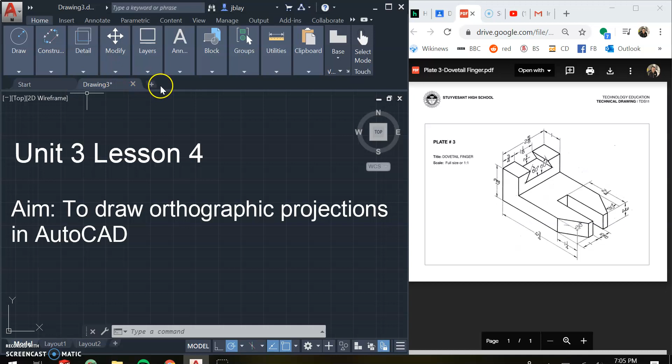So let's get started. Let me open a new tab and start with the front view. We're always going to put the front view in the corner here. So this one's going to have an L shape. As I start doing these, I'm not going to draw any of the hidden lines. I'm just going to draw object lines to start, and then I'll work my way back and draw in the hidden lines.

I'll start by drawing a line for this vertical one here that's 1 3/4. So I'll start at 0, 0, and draw it vertically, 1.75. I'm not going to be able to see it because it's so small, so I'm going to need to zoom in a bit. Draw a line here that starts at the origin and goes the length of this, which is 4 3/4. So I'm taking 4.75.

Then I'm going to draw this line here, this vertical portion. And if I look over here, it tells me that this is 3/4 of an inch tall. So it's 0.75.

I'll go start a new line. I'll go from this corner in, and if I look over here, it tells me that it goes in here 1 inch. And then I go down, and I go down. Okay, it doesn't really give me a measurement here, but it does give me a measurement on the outside. It's 1 3/4. I know this is 3/4, so this must be 1 inch.

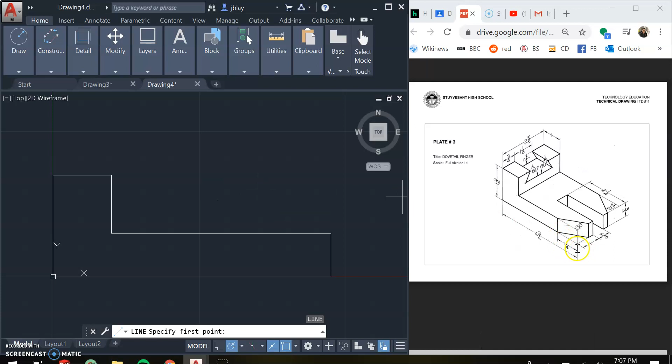And then I'll just connect these two. Okay, great, we're doing great. All we need to do is draw this line here, and we're done with our front view minus our hidden lines. So we'll draw a line, and if I look over here, this is 1 1/4 inches in. So actually, I have a line here—why not just offset it 1.25 inches to the left? Great, there is my front view.

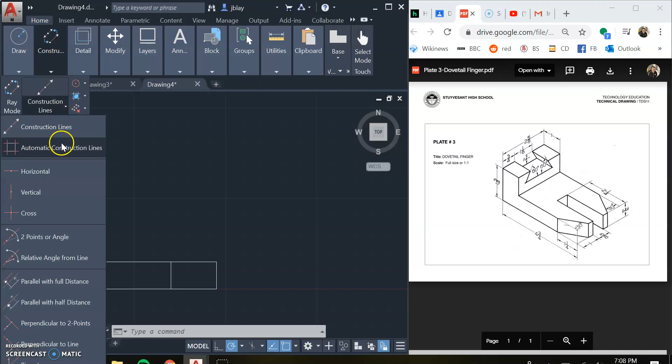Now what I'm going to do next is going to help me a lot. There's one of these construction line options I haven't shown you how to use yet. It's very useful for orthographic projection, and it's called automatic construction lines. What this does is it allows you to select an object and it'll automatically create construction lines that go in whatever direction you select. Now I'm going to just have it go in every direction.

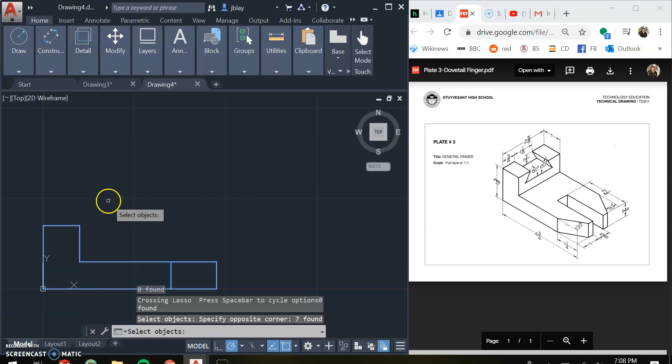I'm going to select all of this. The way I'm able to select everything here is I click and move my mouse. I don't click and hold my mouse, because if I click and hold my mouse, I get a lasso. I click, I release my mouse, move it over, and click again. I hit enter, and it automatically generates construction lines that go in every direction.

One note on these construction lines, though: they make two separate rays. It's not one construction line that goes vertically, it gets broken up. So if I were to delete this line, there wouldn't be a construction line behind it like we normally would. So it's a little bit different in that sense. Otherwise, these construction lines are the same. This is very, very useful for what we're doing right now.

Now I'm going to work on my top view. So now that we're starting our top view, we need to know what space we need to create between views. Usually we would have covered this by now, but because we skipped past mechanical drafting, we haven't talked about it yet. The space that we're going to maintain between our views is 1.25 inches.

Now this isn't a requirement. There is no hard and fast rule about this, but for these it is a requirement because it just makes everything fit nicely. If our scale was much bigger, if we had much bigger objects, we'd obviously want to create more space between our views. If we had much smaller objects, we'd obviously want to have less space between our views.

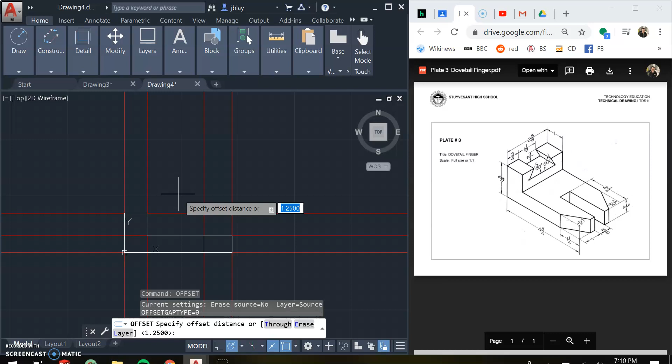But for this, 1.25 is really the perfect amount. So to do this, we're going to hit offset, or 1.25 inches, and we're going to offset these construction lines that far.

Now this is a little annoying because we didn't have a construction line that goes all the way through over here. We have a bit of a break in this section, so I'm just going to create a new construction line that goes horizontally through here. Now I have everything filled in. You can go through and delete those other two if you want, so you just have one.

Now what I'm going to do is create an offset construction line from the line I just drew. This is the start of my top view. Now what is this dimension? I have height and width here — this is my top view. I have width and depth going in this direction.

So my depth is 2 5/8, which is what I'll type in here. So I'll do offset 2 5/8. That math's a little tricky for me, let me think for a second — 2.625. Okay, and I offset that. Click, hit enter, escape, I'm done.

I've created the bounding box for my top view, and I might as well draw a rectangle here.

Okay, now I have these two projection lines. Let's figure out what they're for. This projection line here is for this line over here, so I'm going to draw a line there.

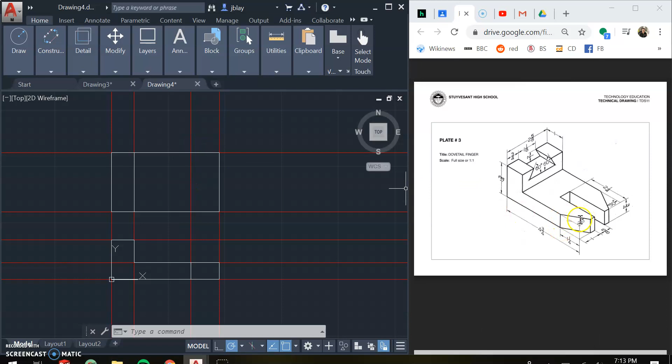Now this projection line, what does that line up with? Let's look over here — it's this line over here that creates that projection of width, this line, so that's this cutout here. So we're going to have from this red line two lines that extend at this angle here, 30 degrees.

So I'm going to type in line, start here. I want to go at 30 degrees, so I'll hit tab, 30, enter, and then zoom in a little bit so we can see what we're working with. I'm going to trim, get rid of that extension, and then mirror this to the opposite side.

Be careful — let's say I haven't mirrored yet and I decided to trim my corner. If I wanted to mirror this edge over to the other side, my midpoint is suddenly in a totally different place because I've cut this line short. So be careful with that — that's why I'm not trimming this corner until after I mirror to the other side.

Got a little crossed up there. Okay, now I have those two corners. Now I should trim.

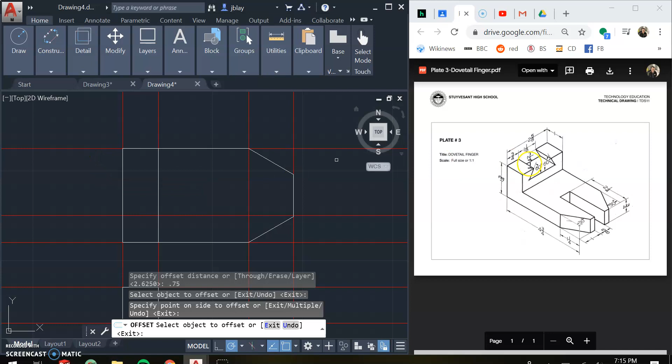And if I do some math here, I can figure out that this distance is also 3/4 of an inch. If I did 2 5/8 minus 1 1/8 and 3/4, I can see this is also 3/4 of an inch. Alternatively, I can just select this line and go up another 1 1/8 inches, so 1.125. And I've set up the positioning for these two lines.

The nice thing about these construction lines going forever in both directions is I'm already setting up my projections as I draw, because I'm going to need to project these features over to my right side view. All right, I'm almost done with my top view — I just need to do this indent here.

Now, I know this indent extends 2 1/4 inches in, but I need to figure out where it starts. Okay, let's see — over here it says it starts 1 inch in, so I'm going to do the offset again, 1 inch. I'm going to offset this construction line up 1 inch.

And then I look at it — 1 inch, and then it's another 5/8 of an inch to the end of the indent. So I'll type in 5 divided by 8 and hit enter. And then I can start my indent. I can draw a line that goes 2 1/4 inches, so 2.25.

And it goes down till it hits here, and down till it hits there. And I can trim so that this is gone. Okay, this is all good and set up.

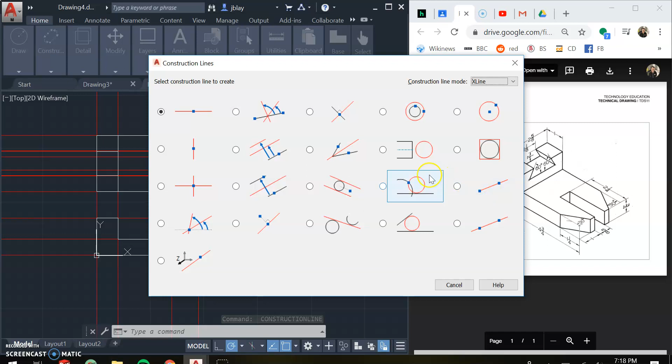So instead of using a regular construction line that goes forever in both directions, I use the type of construction line that only goes in one direction, a ray. So I'm actually just going to type in ray, R-A-Y, select here, and then it'll prompt me to select a through point or an angle.

So I'm going to hit tab, and if you remember, our miter lines are always 45 degrees. So there's our miter line.

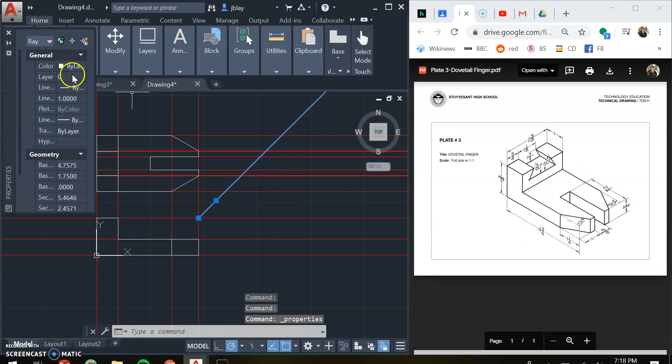I'm going to change the color of it. I'm going to go to properties here. So I would right click on the line. Let me escape this. I'm going to select the line, right click on it, and go to properties, and then I can change the color of the line. I like to make mine green.

Now I've already projected all my features of height over from my front view. Now I have to project all my features of depth over from my top view. I've already projected them over to the right, but now I need to project them down.

So I'm going to go into construction line, and I'm going to select a vertical construction line. And everywhere where my construction lines intersect with my miter line, I will draw a vertical construction line.

Okay, and this should have almost everything I need for my right side view. It exists within here. And what you'll see actually is this distance between these two views is going to be 1.25, just like over here.

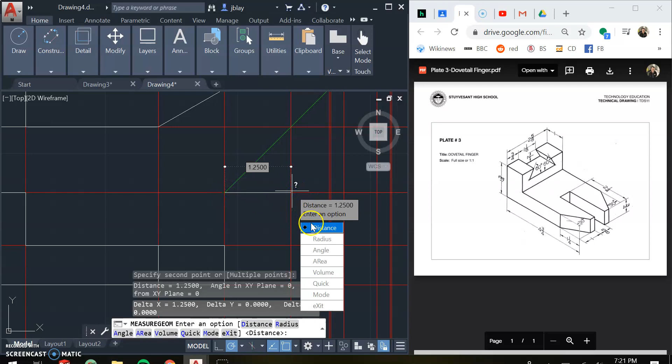If I went into measure, actually I need to go into here and measure distance, and I measured this distance, well, I'll get 1.25. Okay, so you know that the distance between views is correct.

Now, just like before, I'm going to draw a rectangle. So I know that everything exists within here. If I imagine this from the right side view, I know there's going to be a line that goes across here.

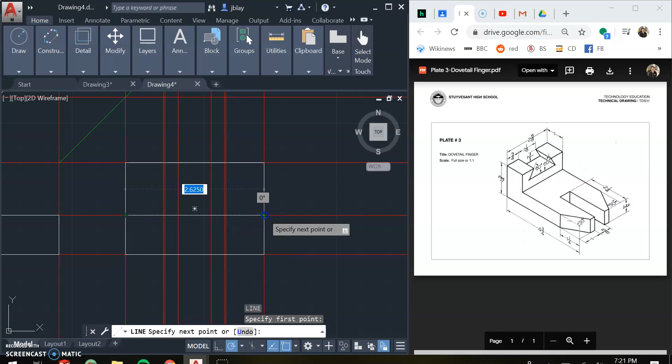Now I have to be careful because I'm drawing this bottom part, but there are construction lines here that describe what's going on up top. So I'm first going to look at this section here, wherever this line should be.

That's going to come from this corner here. So I'm just going to trace that. I'm going to select that construction line and make sure I'm selecting all the correct things. So I selected that construction line. This is the construction line that gets generated when it intersects the miter line. So that's the one I'm going to use.

And I'm going to draw a line right there. So it's the further in one, the one that's closer to the edge. And then I can mirror it to the other side, or just know it's the further in one on the right side as well, and draw that there.

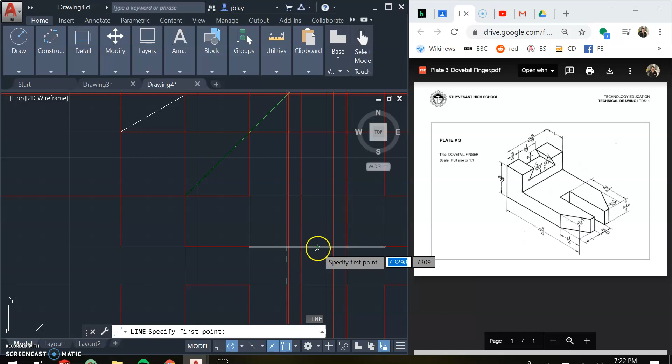Then there's going to be another line here and here. That's these two on the ends.

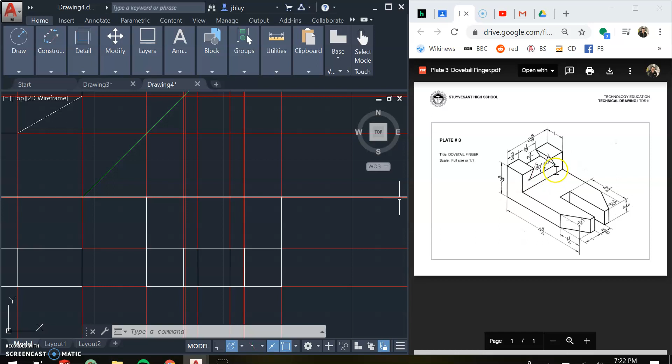Okay, now there's going to be this line here. That's going to be 1/2 inch down from the top for this line here that goes across. So I'm going to type in offset 0.5, click on this, and go down and enter.